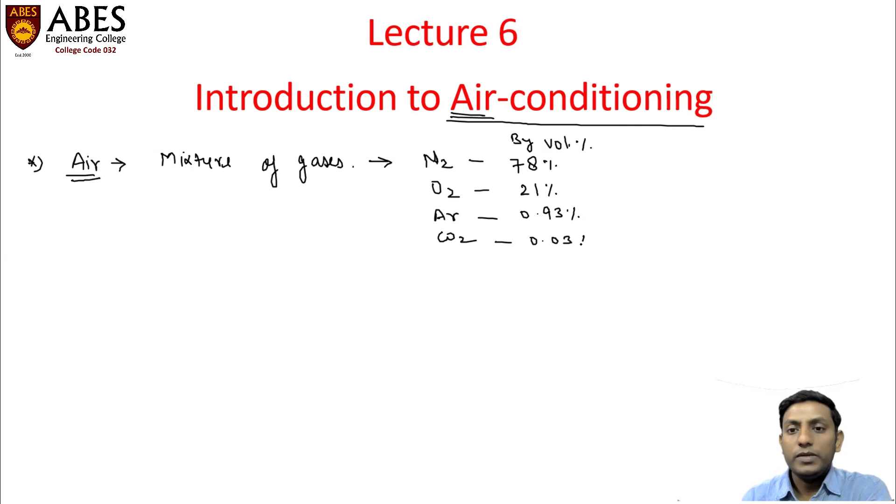And if we calculate its composition, then by volume percentage, nitrogen is around 78%, and oxygen constitutes almost 21%. That is nearly 99% of the air. Similarly, argon is approximately 0.93%, and carbon dioxide is approximately 0.03%. And this is by volume, right? So this is what we have studied at school level,

on the basis of which, when we calculate the molecular mass of air, it turns out to be somewhat near to 29. And the gas constant of air is assumed to be 0.287 kilojoule per kg Kelvin, right?

But when we talk about air conditioning system, then we call this thing not just air, but dry air. What do we call this thing? Dry air. And I'll tell you the reason. Why do we call it dry air? The reason is pretty much simple. The air which is surrounding us right now and throughout the year, 24 by 7, contains not only the gases, but also water vapor, right? So the air which is surrounding us is actually called moist air. So this is nothing but dry air plus water vapor.

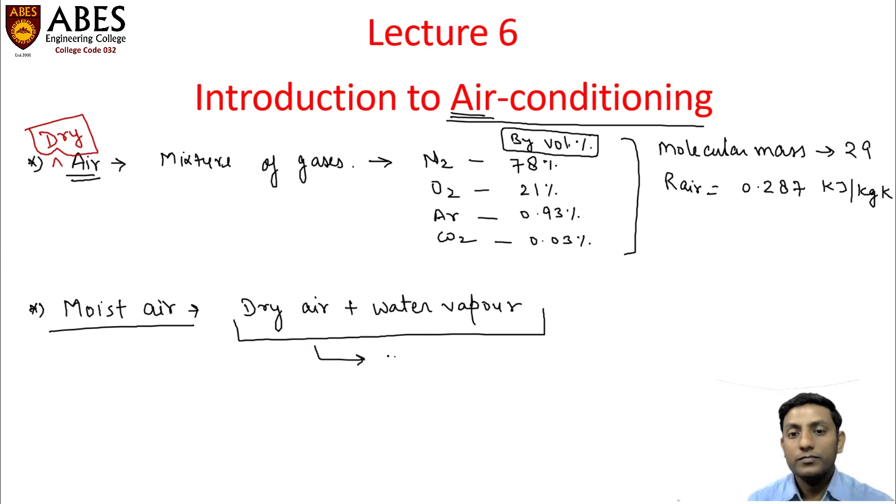So if we want to create comfort conditions for us, which depend upon the air which is surrounding us, then we will have to study not just the dry air, but the mixture of water vapor and dry air. And the study of moist air is called psychrometry. Psychrometry. Okay. So this is basically what we are going to talk about in air conditioning systems.

Now, when we say the water vapor is present in the air, then there has to be a limit up to which water vapor can dissolve in dry air. And that thing is called saturated air. I'm sure you are already familiar with the name saturation. So it simply means when air has dissolved the maximum possible water content, it becomes saturated air, right? So what about the other times when the air does not contain the maximum possible amount? Then this is unsaturated air.

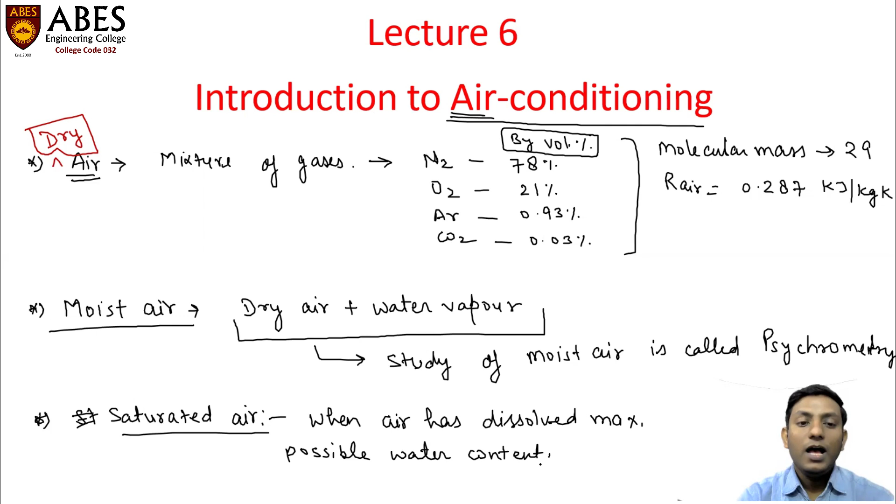And this is on the basis of which we can define a very important property, which is nothing but degree of saturation, which is commonly represented by the term mu. So degree of saturation is nothing but by what percentage the water vapor is present in the air. It is defined as

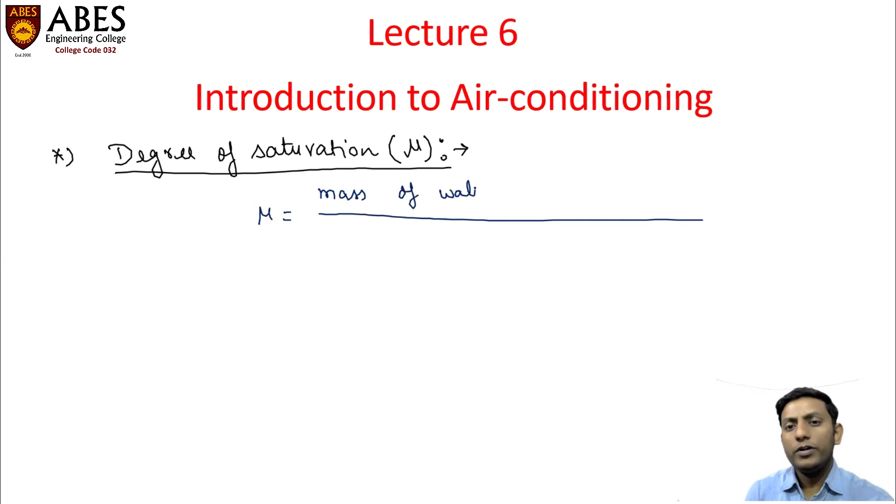the mass of water vapor in 1 kg of dry air to the mass of water vapor in the same amount of dry air when it is saturated. You see? So this is to denote by what percentage the water vapor is present in the air.

Okay. The next important thing that we are going to define is humidity. So this thing is called humidity. Sometimes it is called specific humidity.

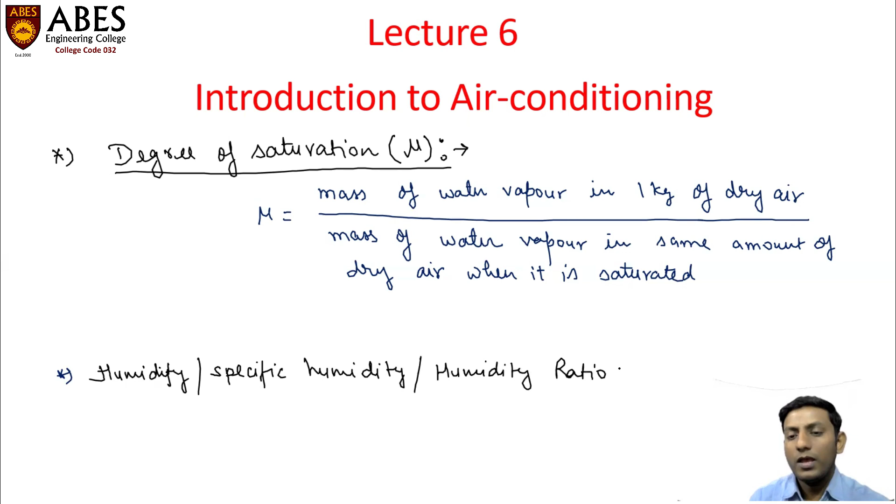Also, it is called humidity ratio. And it is commonly represented by symbol omega. So omega is defined as mass of water vapor present in 1 kg mass of dry air.

Right? So if you carefully look at this definition, degree of saturation, then you would notice that mu is nothing but omega divided by omega saturation. That means humidity of unsaturated air to the humidity of saturated air, right? And if we try to represent it in terms of a formula, then it can be calculated as 0.622 PV upon PT minus PV.

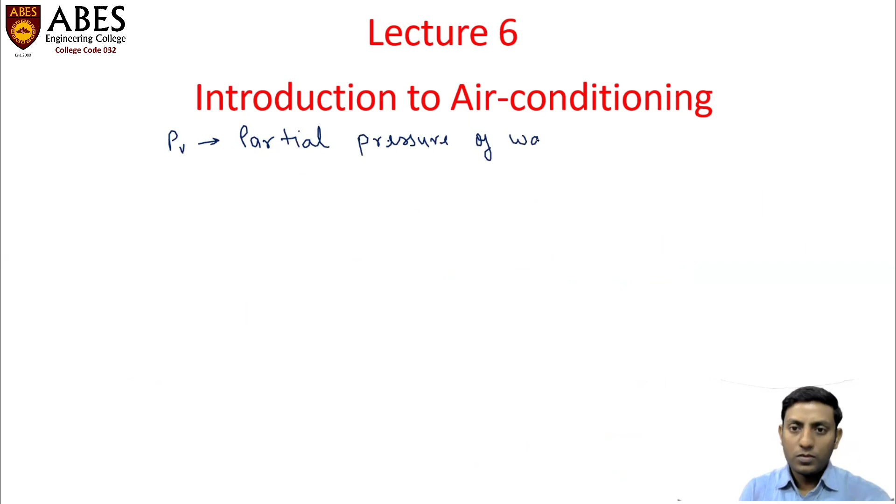Whereas PV is partial pressure of water vapor, whereas PT is total pressure of the air, right?

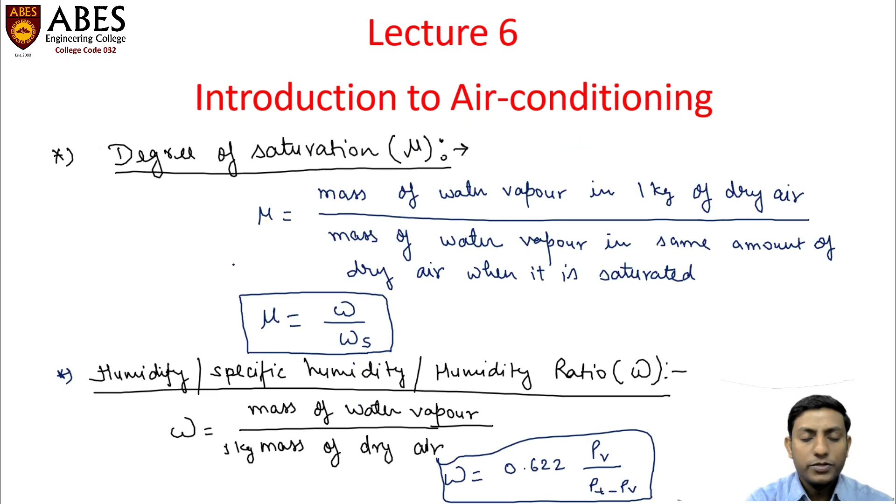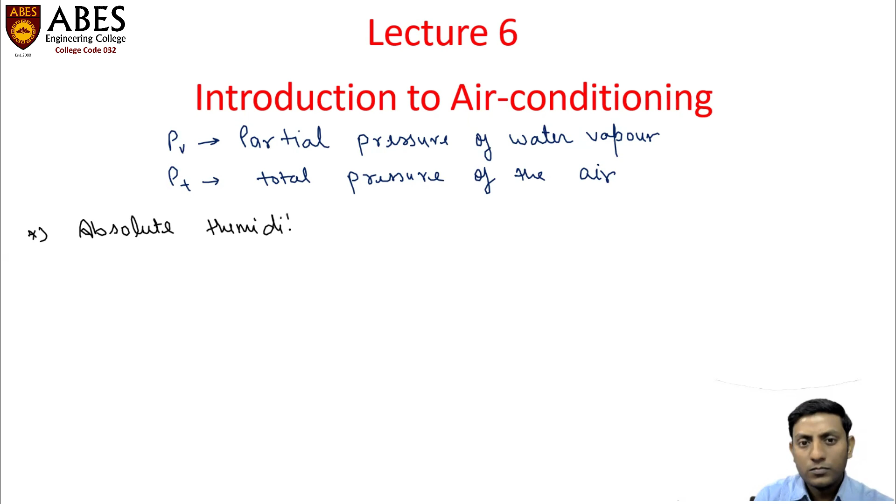In a similar continuation, now we are going to define absolute humidity, which is defined as mass of water vapor present in 1 cubic meter volume of dry air.

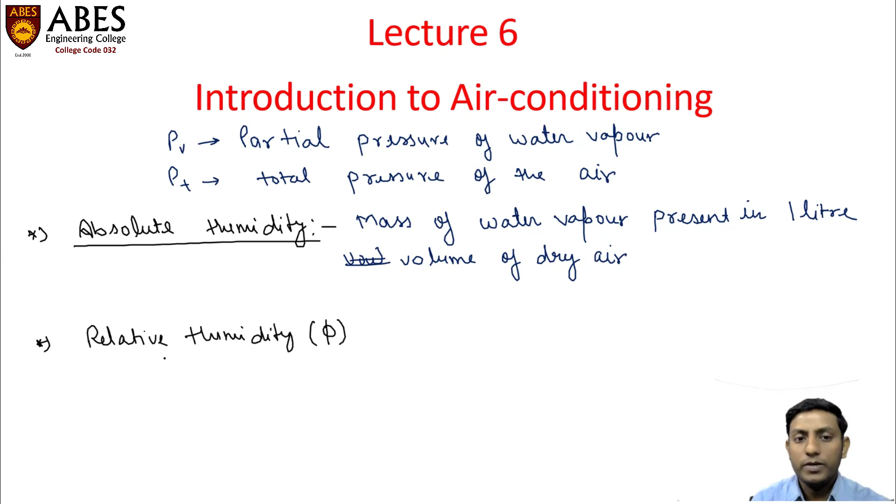In the same category, the next definition, which is very important, is relative humidity, commonly represented by symbol phi, which is defined as mass of unsaturated vapor to the mass of saturated vapor, which can be represented in terms of pressure also. So pressure of unsaturated vapor to the pressure of the same thing when it is saturated. So I'll put it in terms of words also here.

Phi can be defined as mass of water vapor present in unit volume of air to the mass of water vapor in same volume when it is saturated at same temperature. You see? So this is relative humidity.

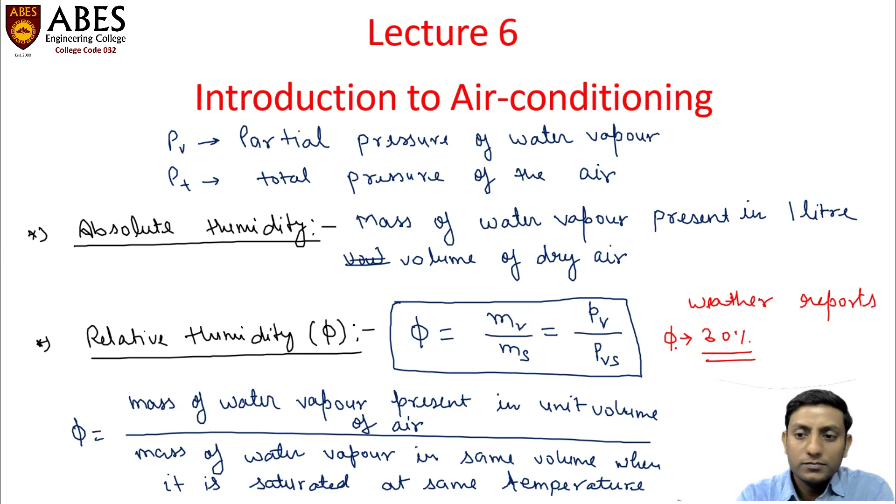The next definitions which I'm going to talk about are some temperatures which are associated with psychrometry. First temperature is dry bulb temperature, or called DBT. So dry bulb temperature is nothing but a temperature measured of an unsaturated air by a simple thermometer.

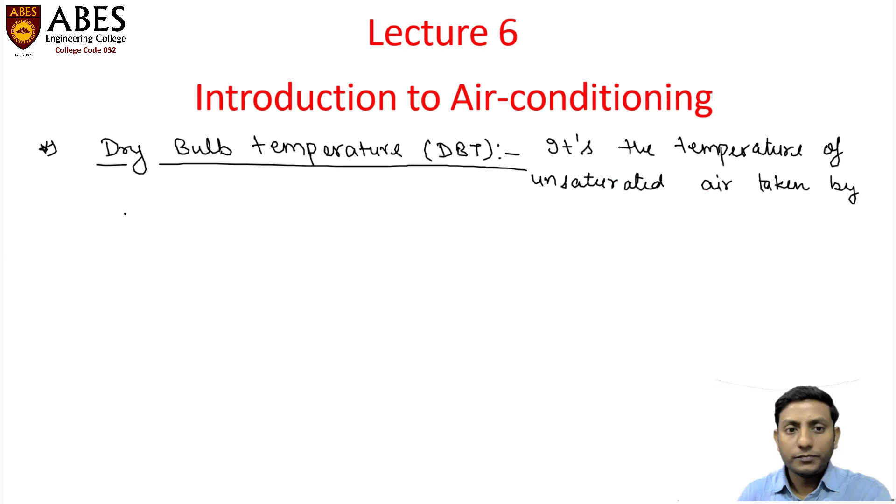It is the temperature of unsaturated air taken by an ordinary thermometer. Right? So it simply means if you just put a thermometer in a room, then the temperature shown by a thermometer would be a dry bulb temperature, right? So what do we mean by dry bulb is also going to be discussed a little later. So just hold on a second.

The next thing is wet bulb temperature, or WBT. So wet bulb temperature is, so let us say this, I'm sure you must have seen a thermometer, which is generally a liquid in glass type of thermometer, which we use for measurement of fever. So this is something like this, right? In which you will see some of the scale markings are there on the outer periphery. And in between, some kind of liquid, for example, mercury is filled here, right?

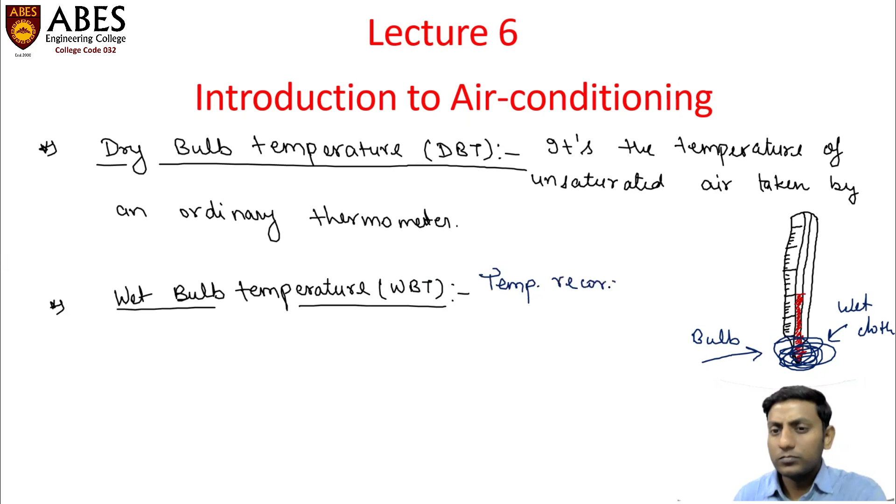So this temperature is temperature recorded by a thermometer when its bulb is enclosed or covered by a wet cloth.

Okay. So the next definition is dew point temperature. The last definition, which is important here, is dew point temperature, or called DPT. So you see, the water vapors present in the air are in vapor form. And when it gets cooled, the water vapor present in the air also gets condensed into liquid form. So the temperature at which this condensation starts is called dew point temperature.

The temperature at which the water vapor present in the air starts condensing into liquid form is called dew point temperature.

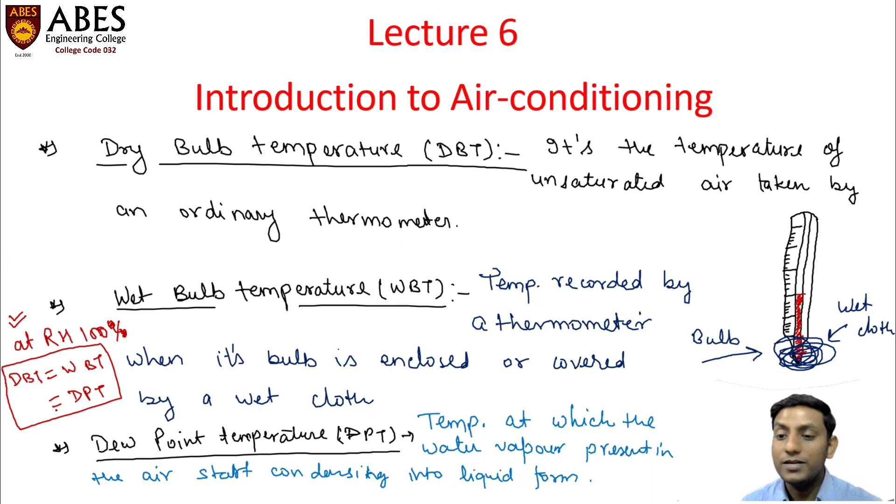See, so just one more piece of information is when relative humidity is 100%, right? The air has got fully saturated, then dry bulb temperature becomes equal to wet bulb temperature, which is equal to dew point temperature. So all three temperatures become equal to each other. When? When the air is fully saturated, when relative humidity is 100%. Okay.